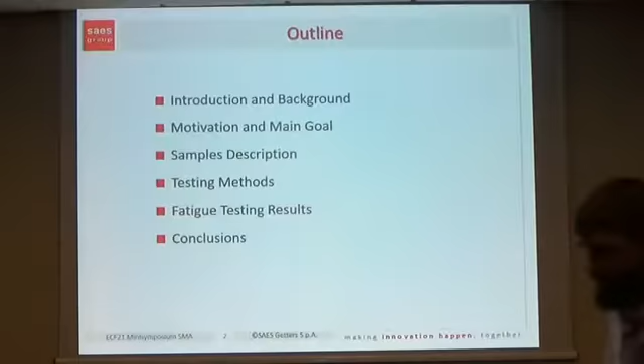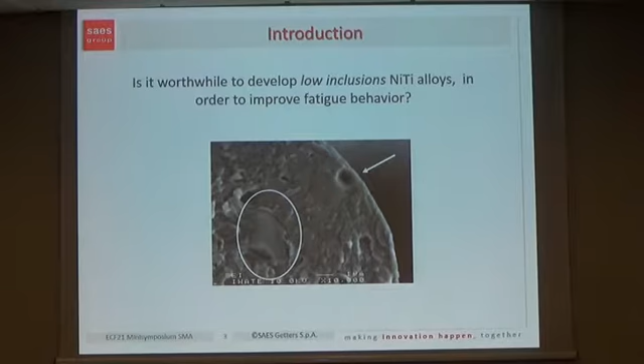Especially focused on industrial application, used in automotive, domotic, white goods, and so on, in principle as actuators. But the story starts, I would say, 5 years back, at least, when a question came up in our R&D department: is it worthwhile to develop low inclusion nickel titanium alloys to improve fatigue behaviors? Until then, the effects of the material structure on the fatigue received not so much attention, especially related to the topic of inclusions.

Most work was dedicated to the study of monotonic properties. Relatively few works were done at the time on understanding the effect of inclusions, but without any systematic approach and without clear, comprehensive study and conclusions.

Also, the regulations today used, especially for NiTi or for medical devices, allow inclusions up to 30-some microns, but this measure is typically carried out at the semi-finished products. That means that at the end, on stents, on fine wires, and so on, the maximum inclusion size is unknown.

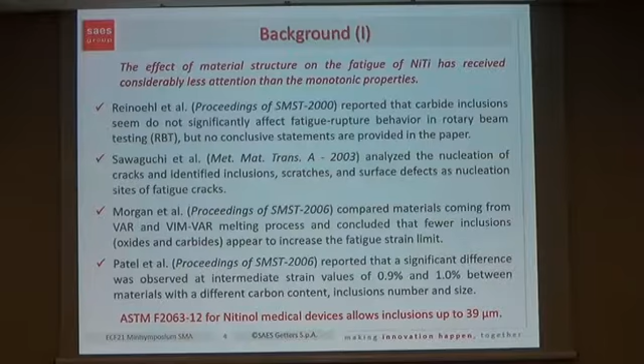But quite recently, several systematic studies were done by different groups, and they came to the conclusion that the inclusion size has effects on the fatigue behavior, and it is one of the most important effects of inclusions.

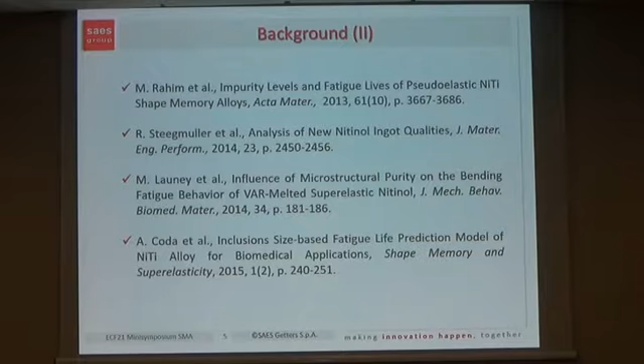Some statements before presenting our work are necessary. In our experimentation, and this is the first part of the story, we try to understand if there is some effect and what kind of effect the inclusions have.

Most of you know, looking at the fracture surface of, for example, nitinol wires, it is not unusual, typically, to find at the crack tip inclusions. In this case, what we call typically intermetallic oxide, Ti4Ni2 with oxygen, sometimes not stoichiometric, and sometimes titanium carbide, that is the other main inclusion.

The difference is in carbon and oxygen content. Most people look at the gas impurity level to say something about inclusions. But the carbon and oxygen content between different melting approaches, typically used by melters, for commercially available materials, does not result in a measurable difference in fatigue resistance. That's another important point we will get back to in a few minutes.

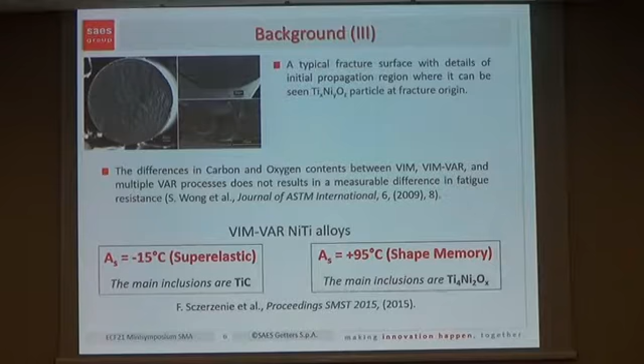So looking at carbon and oxygen is not conclusive about the inclusion size, the area fractions, or the effects on fatigue. Our hybrid VIM-VAR approach on nickel titanium production brought to the conclusion that standard superelastic alloys used in biomedical applications have titanium carbides as the main inclusions. This doesn't mean that intermetallic oxides are completely absent. On the other hand, in shape memory materials, As around 95, the main inclusions are intermetallic oxides.

Our work in understanding the effects of inclusions on fatigue was focused on superelastic wires, and these are the main conclusions. We analyzed a lot of failed wires after different fatigue testing using rotary beam tests, and we analyzed the fracture surface, and we found that the inclusions at the crack tip follow typical Gumbel distributions.

The population in different materials follows a different, you can see, Gumbel distribution function. In this way, we were able to distinguish the effects of different inclusion types, size, and distribution in different commercially available materials. On the other side, we looked at the extreme inclusions using this approach.

Also following the recommendations of ASTM E2283, which are the recommendations for, in general, ball bearing steel, high performance steel, but we applied this procedure also to NiTi. The most important conclusion is that the fatigue limit measured from our strain-life curves is perfectly correlated to the max inclusion size at a fixed return period. You can select 100, 1000, whatever you want, but the relation is always the same.

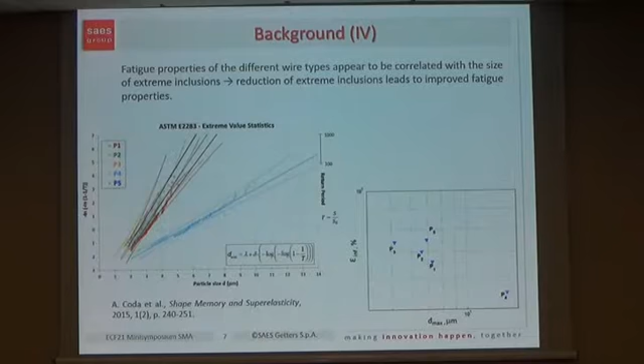Well, as always happens in industry, there is a second part of the story to continue the R&D activities. We need a motivation to improve, to make efforts in improving materials. And the motivation is represented here, especially in industrial applications as shape memory actuators.

SMA wires are growing in use because the bigger players in these fields, in industrial devices, are exploiting shape memory advantages, especially due to the very high force-to-weight ratio of wires, especially very thin wires, to conceive and produce new devices, new actuators. These are two of the most important examples: one is a pneumatic valve for the control of comfort seats in cars.

Another important area with very high expectations from mobile phone manufacturers is camera modules based on shape memory technologies for optical image stabilization and autofocus of video cameras in smartphones of next generations. In this case, 76 micron wires are used, and in this case, 25 micron wires. We are talking about very, very thin wires.

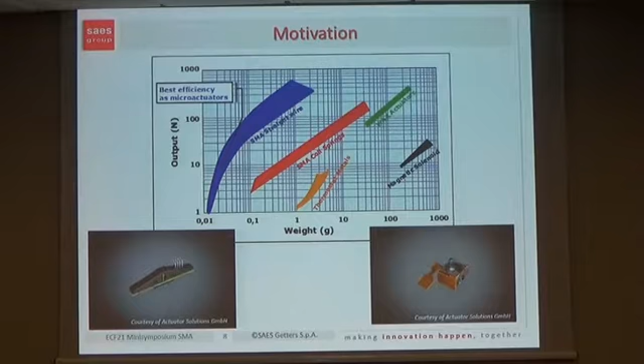So what is the problem? The problem is that inclusions become bigger and bigger relative to the reduced size of the wire, the cross-section we would like to use, as represented here. So we had an industrial motivation to improve the fatigue of our materials, to allow faster growth of industrial applications, for example what I reported in the previous slides.

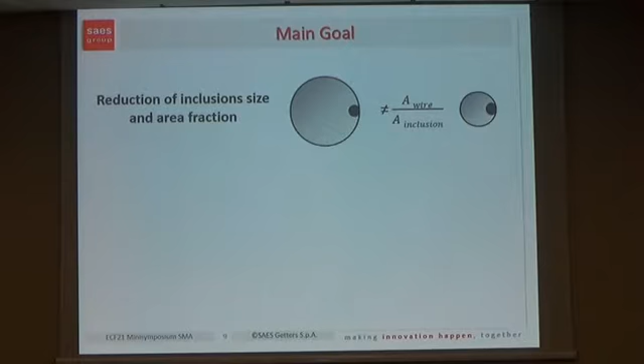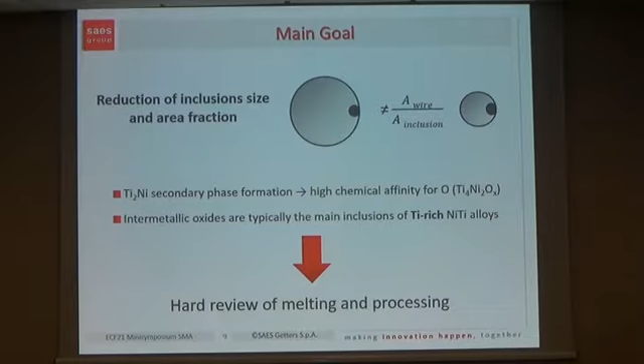This was achieved through a very thorough review of melting and processing of the materials. I cannot enter into too many details, but we did a huge amount of preparation in terms of ingot and semi-finished products. We improved and controlled our processing conversion parameters. We also improved the control and selection of raw materials, and in the end we were able to reach the goal. I'm going to show you the results.

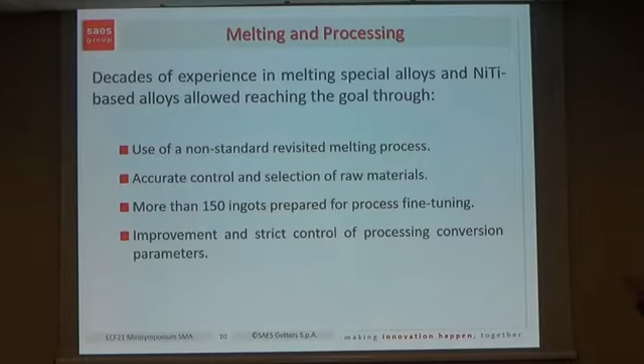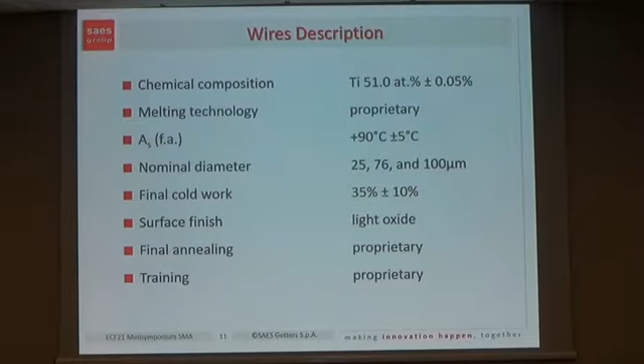The results are a comparison between our standard 25, 76, 100 shape memory wires. Smart Flex wire is our standard trained actuator, titanium rich, standard AS 90 degrees C. We prepared ingots with a new combination of melting and processing, while keeping everything else constant in terms of cold work, surface finish, final annealing and training, in order to neutralize as much as possible the secondary effects on fatigue behavior.

We also checked the gas impurities and transformation temperature. This is our standard historical reference material compared with our improved alloys. As I mentioned at the beginning, looking at carbon and oxygen gives some indication about the potential inclusion size or area fraction and the effect on fatigue.

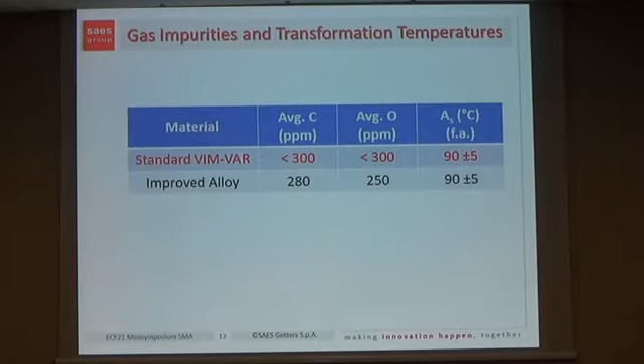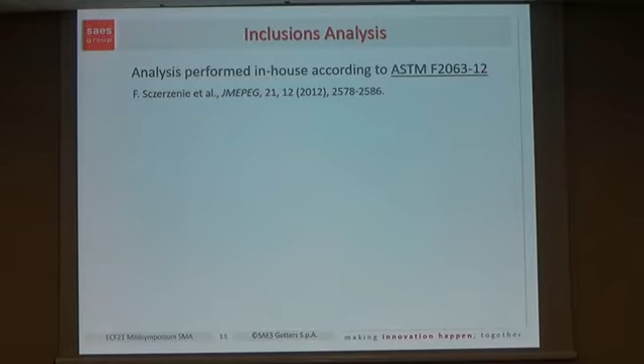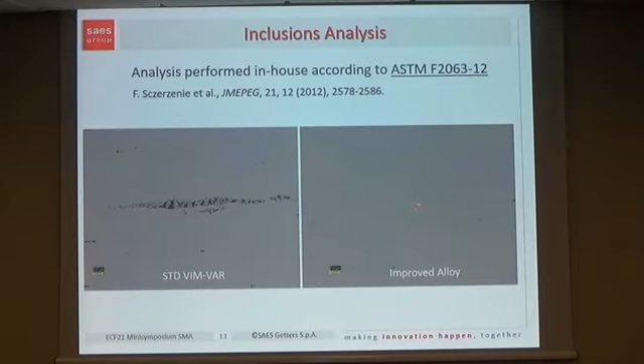This is only a qualitative picture, but these are the numbers. They show that for the shape memory formulation, titanium rich, the max inclusion size is reduced more than 5 times, and the average inclusion size, which is important, is systematically below 1 micron for the improved alloys, with more than 99% of inclusions below 3 microns.

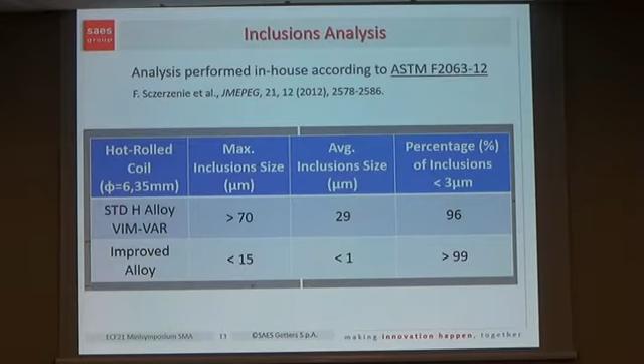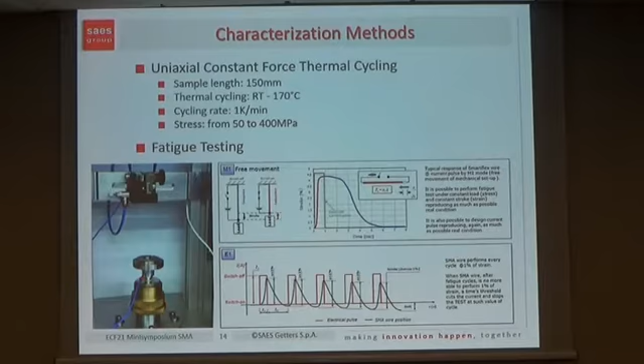We characterized the wire to be sure everything was perfectly in line, and I won't go into details about the characterization method. We typically use uniaxial constant force thermal cycling and fatigue testing according to the sketch reported here. I would say the hysteresis curves are similar, so nothing special or any significant differences.

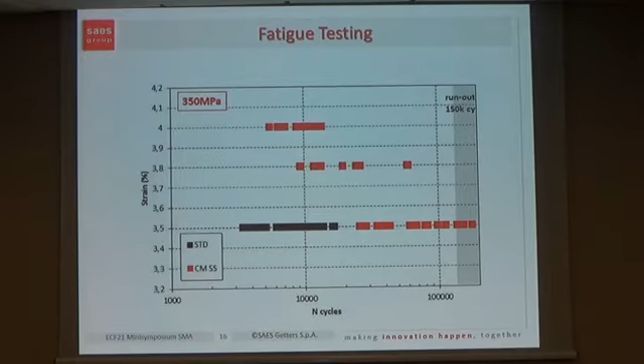And these are the fatigue testing results. We selected 350 megapascal, which is quite a stressed condition for a 25 micron wire in this case. You see in red the wires produced with the improved alloys, and in black the standard. In black, 3.5% strain is the maximum we are able to reach; it did not survive more than 10,000 cycles as we increased the strain amplitude of load. We fixed our run-out criteria at 150K cycles, and these are the numbers.

To give you the numbers again for these conditions: 3.5% strain, 350 megapascal stress. For 25, 76, and 100 micron wires, even though for 76 and 100 micron we still need to work to increase the statistics, the differences are quite evident, both on the average and on the minimum number. We are in the range of 2 to 8 times the standard materials. But by changing the conditions to less aggressive ones, we observe an improvement in fatigue life of over 100 times for these low inclusion wires.

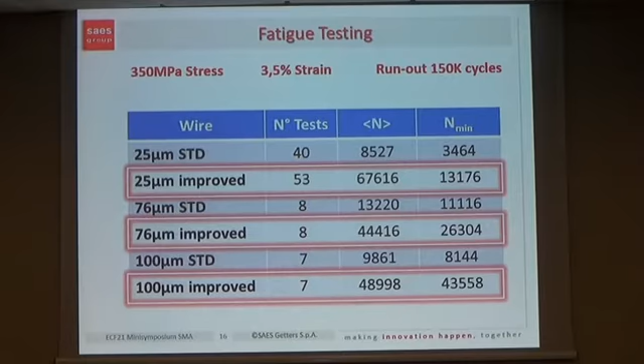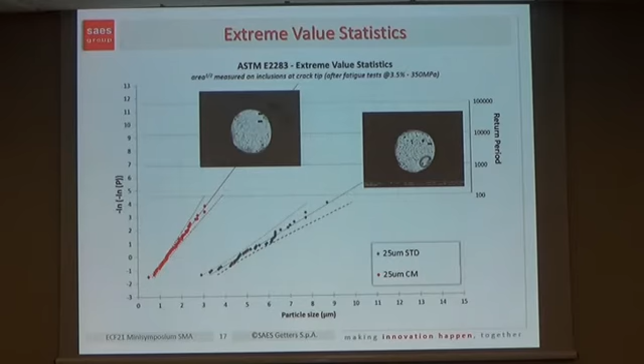We also checked the fracture surface of all the tested wires, applying again our extreme value statistics to this material. This is clear also in this case: the distribution of extreme inclusions is completely different. We move to a very, very low inclusion size in the improved wires, so we are almost always below 3 microns at the crack tip in terms of max inclusions observed.